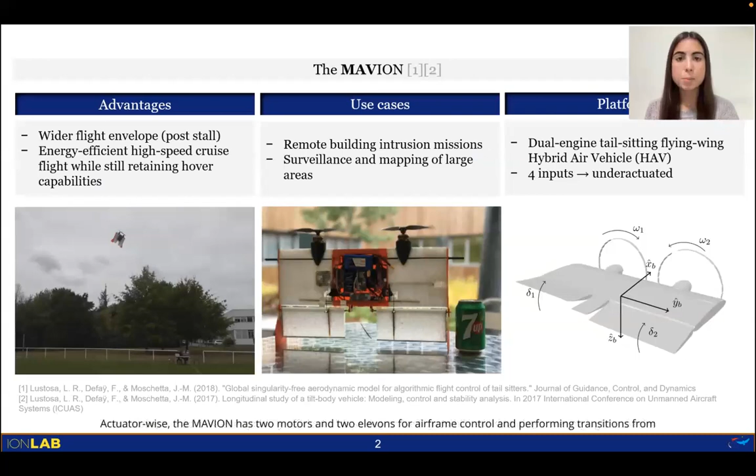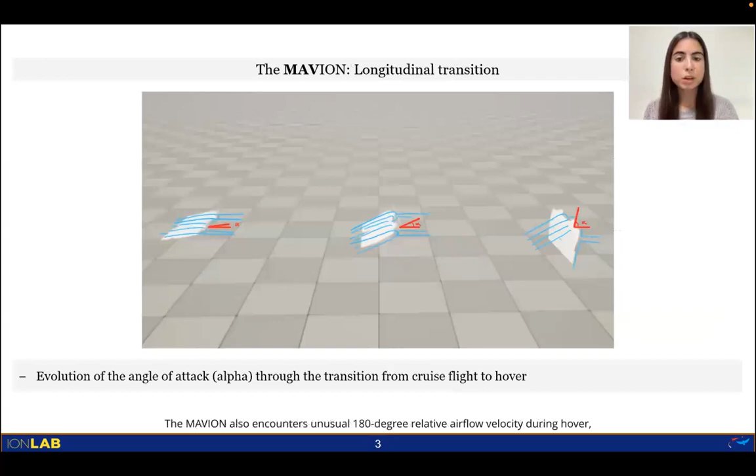Actuator-wise, the Mavion has two motors and two elevons for airframe control and performing transition from tail-sitting hover flight to cruise forward flight. The flight transition involves significant changes in the Mavion's angle of attack alpha. The Mavion also encounters unusual 180-degree relative airflow velocity during hover, which is not commonly modeled in traditional flight mechanics models. Furthermore, in hovering mode, the direction of airflow, that is, the inexistent airflow in wing sections out of the propeller slipstream, is ill-defined.

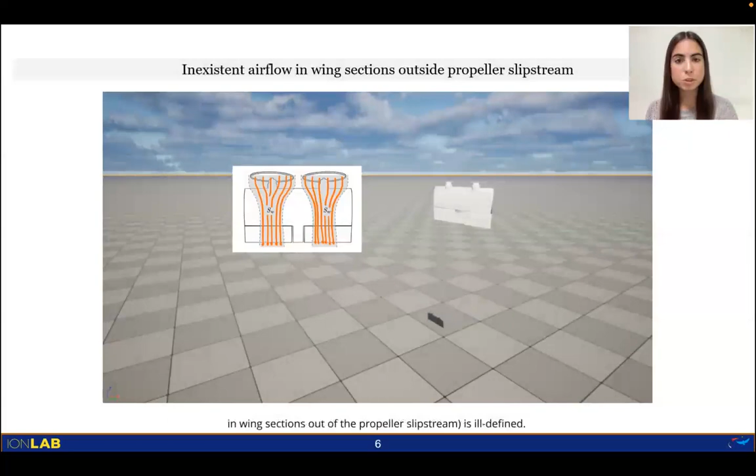Additionally, Phi-theory is optimization-friendly since it naturally imposes a global polynomial form on the differential equations of motion, which allows for agile sum of squares-based controllers. Previous work proposed an efficient trim point solver called Phi-trim, which addressed the full longitudinal envelope of the Mavion, especially relevant in transition, ensuring the existence of a unique pair of state x and input u that satisfies the trimming condition, x dot equals 0, for each achievable airspeed under Phi-theory modeling assumptions.

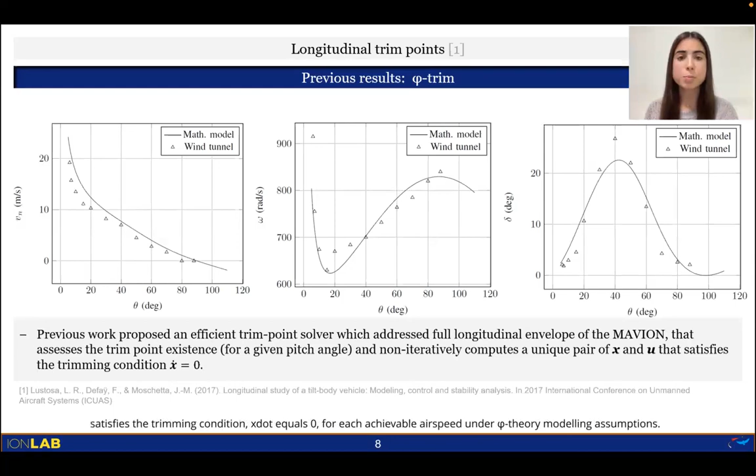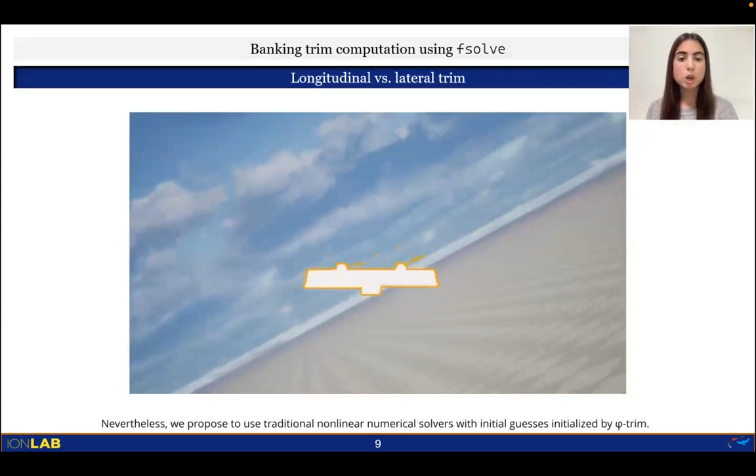Banking turn, or lateral trim points, pose greater complexity. For instance, Phi-trim is not extendable to compute trim points during turns, and our group is still researching fast and reliable trimming algorithms. Nevertheless, we propose to use traditional nonlinear numerical solvers with initial guesses initialized by Phi-trim.

We define a banking turn limit cycle as a periodic solution actuated by a constant input, where each limit cycle is associated with a unique input u and hence identified by its associated v and omega. This yields an attitude description periodic in yaw, but constant in pitch and roll, thus extending the limit cycle description to v, omega, u, theta, and phi. The set of all limit cycle descriptions for a given omega and v is numerically computed for the Mavion using the fsolve routine in MATLAB.

The points v, omega outside the illustrated flight envelope fail to converge to a solution within our acceptable tolerance or maximum iterations. We place no limits on actuation, yet we observed that actuator values are well within reasonable values. Therefore, we concluded that flight envelope limitation is of banking aerodynamics nature, and longitudinal maneuvers such as hover to cruise transition fall within the Phi-trim envelope.

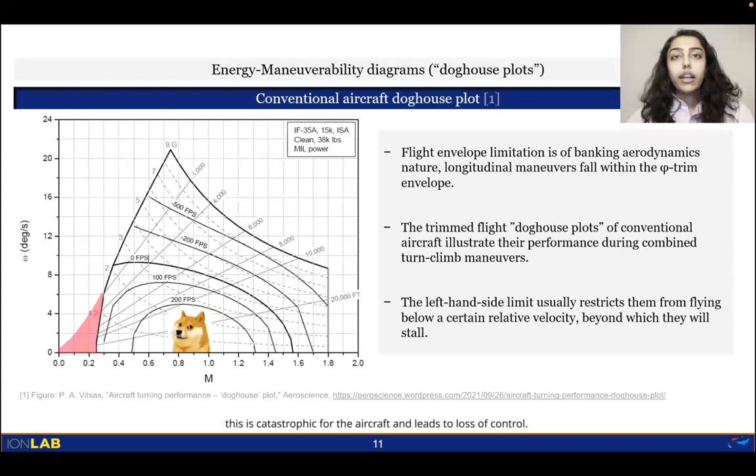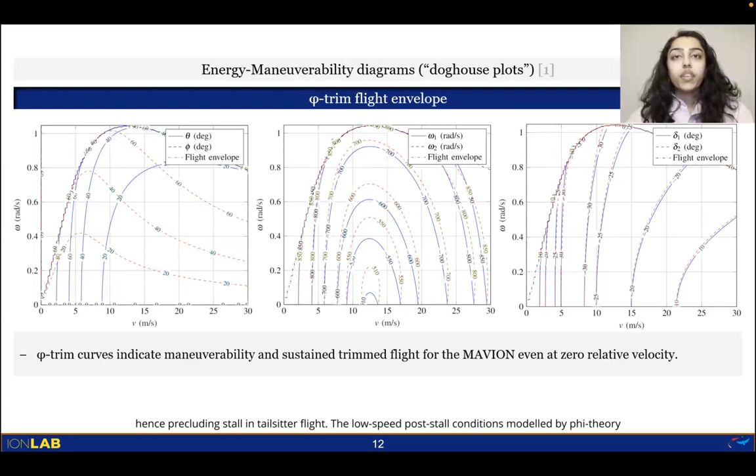The trimmed flight doghouse plots, also known as energy maneuverability diagrams of conventional aircraft, illustrate their performance during combined turn-climb maneuvers. The left-hand side limit, as you can see, restricts them from flying below a certain relative velocity, beyond which they will stall. This is catastrophic for the aircraft and can lead to loss of control. The Phi-trim curves, on the other hand, indicate maneuverability and sustained trimmed flight for the Mavion, even at zero relative velocity, hence precluding stall in tail-sitter flight. The low-speed post-stall conditions modeled by Phi-theory are seen in the doghouse plots for the Mavion.

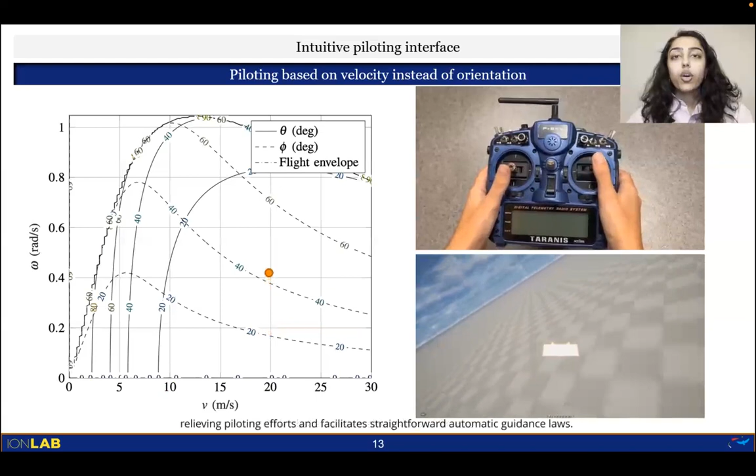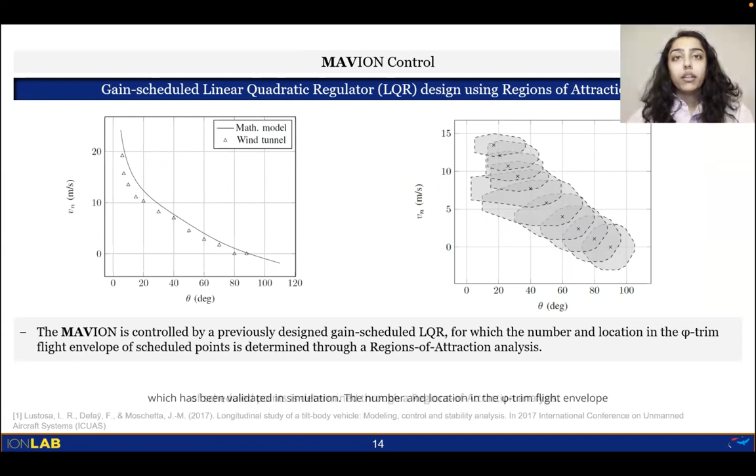Our Phi-trim results also allow us to define a proposed intuitive pilot interface, unambiguously defined by desired velocities v and omega rather than orientation. This abstracts the internal workings of the drone, relieves piloting efforts, and facilitates straightforward automatic guidance laws. For in-flight control, this work exploits a previously designed gain-scheduled LQR, or linear quadratic regulator, which has been validated in simulation. The number and location in the Phi-trim flight envelope of the scheduled points is determined through a regions of attraction analysis.

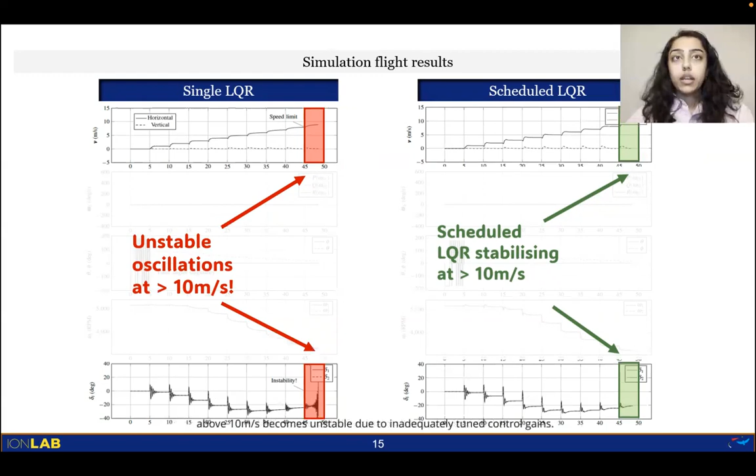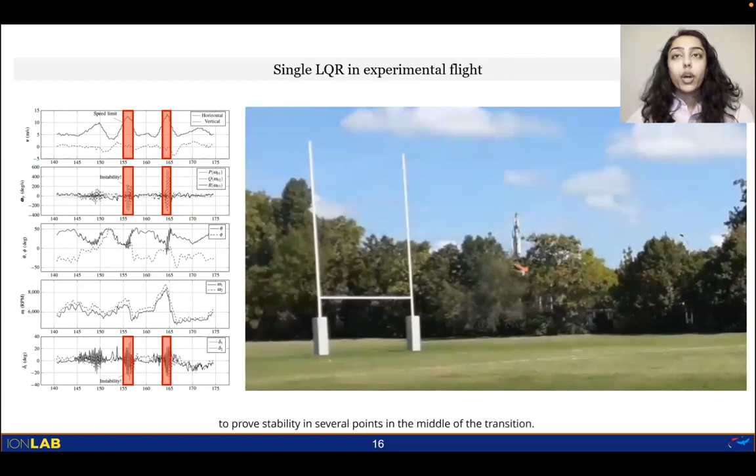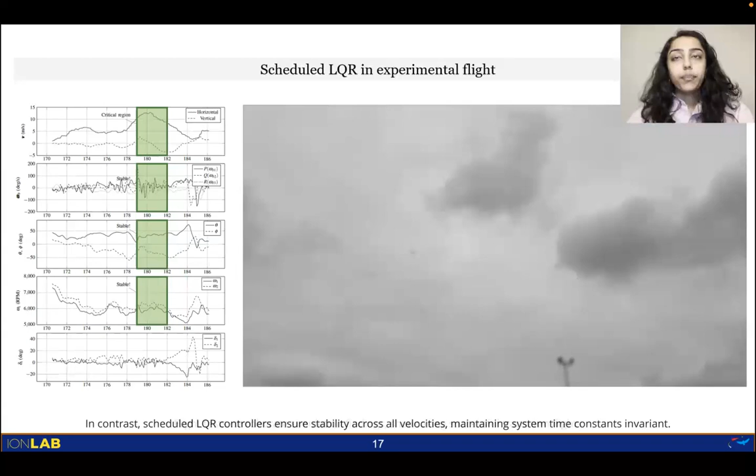The necessity for gain scheduling is highlighted through simulation results, which demonstrate the instability of a single LQR controller during flight transitions. While hover stability is maintained, transition flight above 10 meters per second becomes unstable due to inadequately tuned controller gains. The velocity v in simulation is slowly incremented by 1 meter per second to prove stability in several points in the middle of transition. In contrast, scheduled LQR controllers ensure stability across all velocities, maintaining system time constants invariant. Flight tests corroborate simulation findings, showcasing successful transition flights and the elimination of instability issues with scheduled LQR controllers.

In conclusion, a graphical illustration of Phi-theory derived trim points is presented in the form of doghouse plots, allowing us to conclude that flight envelope restrictions are determined by banking aerodynamics, and previously computed longitudinal trims fall within these envelopes. The expansion of doghouse plots to low speed conditions, even zero hover speed, is now possible to model thanks to Phi-theory. The banking turn trim points are used in the regions of attraction analysis for scheduled LQR design, which is validated in both simulation and experimental flight.

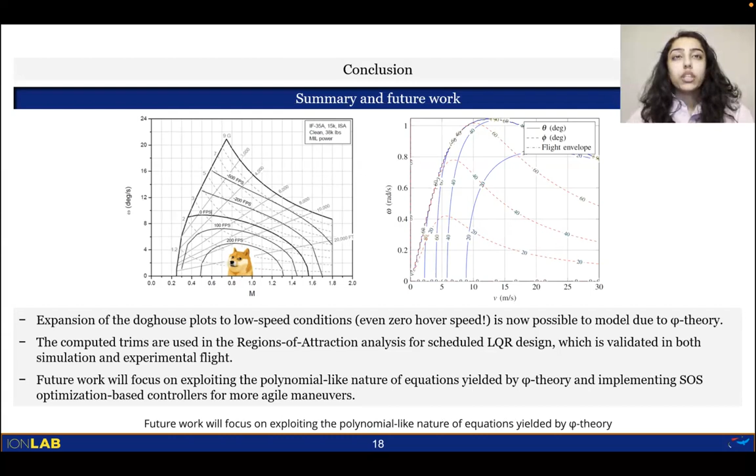Finally, future work will focus on exploiting the polynomial-like nature of the equations yielded by Phi-theory and implementing sum of squares optimization-based controllers for more agile maneuvers.